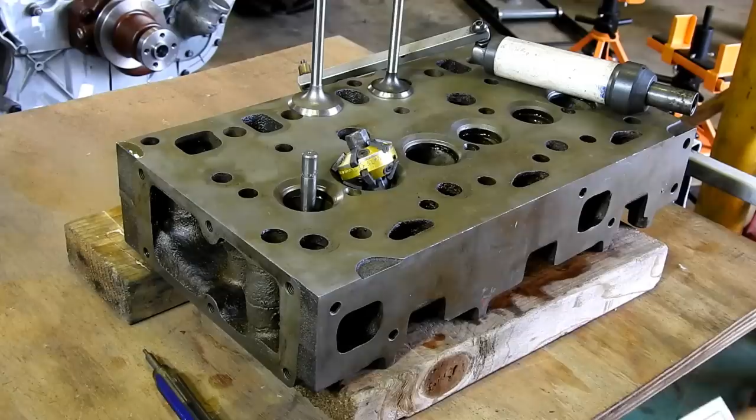We have the cylinder head set up here, and it's sitting up just on a couple of bits of wood, and we found a guide.

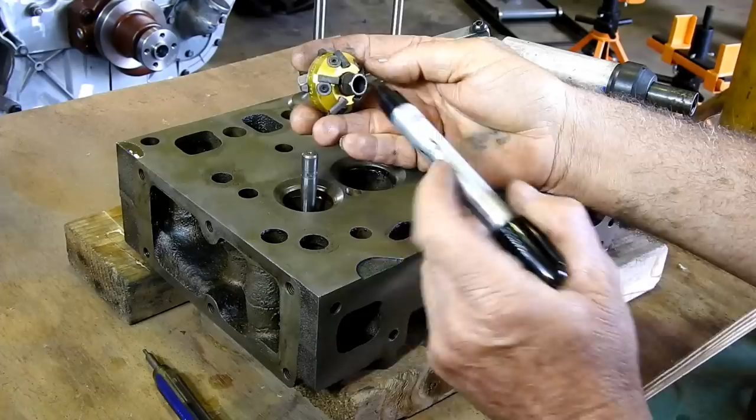Now I use Neway cutters, so have a look at Neway cutters. There's a website for them and all that. You can buy them online, but they're quite expensive, and you get a cutter with some blades in it, and replaceable blades, and we can move them up and down depending on what we need to do, how big the seat is.

And we have a 46 degree this side and a 44 the other. So that 1 degree angle just helps your valve wear better. So the inlet and exhaust valves on this engine are different sizes, but they're both 45 degree.

So we have a flat here. Now you can see the little flat on the valve. The old valves were getting thin, and on the exhaust valves, if it's too thin, it burns around the corner, and that's how you get a burnt valve.

Now you have a surface area here which is 4 millimeters, a little bit over 1/8 of an inch, and what we're looking to do is have the valve seat. If I colour all that in, then just wipe the top edge off. That's not a very good example, really. We're looking to leave about a 1/16 of an inch above. So if we have the valve surface area, something like that, can you see that?

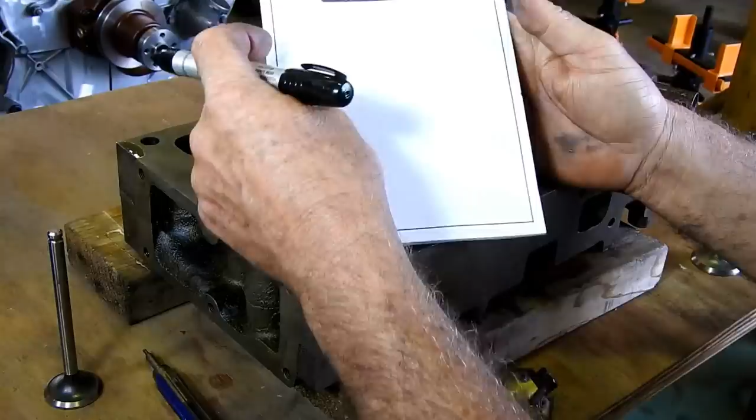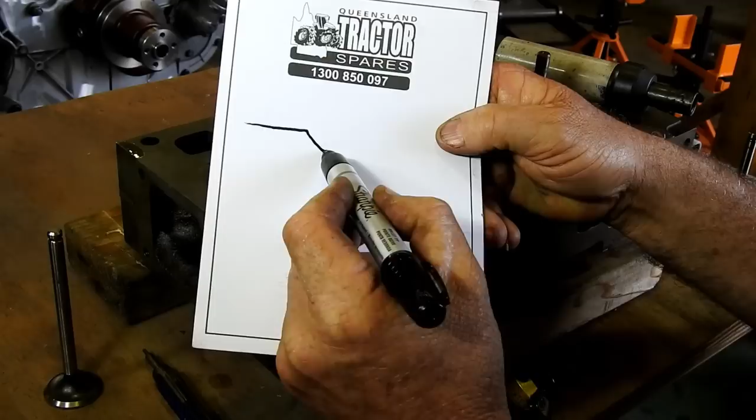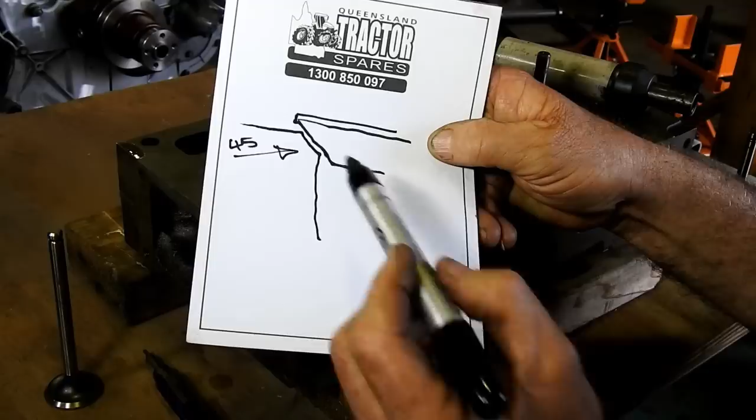I've got a thumbnail sketch here, bit of a guide to see. So normally on this cylinder head, this here would be 45, and when the valve comes down, and that's the valve head roughly, and so we want this to seat around the middle, possibly up towards the top a little bit, but around the middle of that seat.

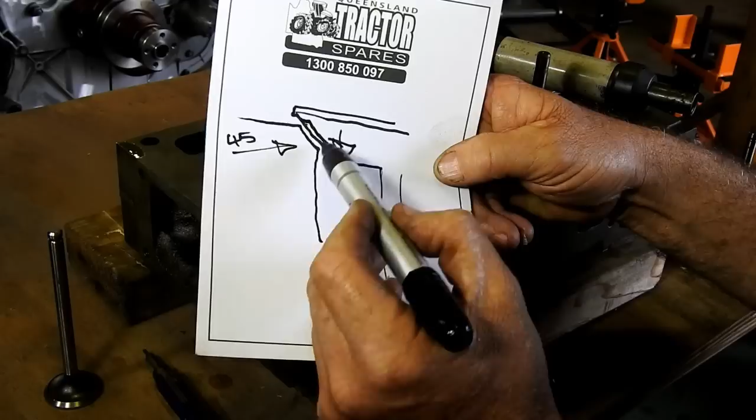Now over time, because the valve goes up and down, up and down, up and down, it wears into here. So we end up with a worn patch here. Then of course, as this valve wears down further, this seat, it wears and it gets a little bit wider, and the valve, instead of just sealing halfway there or a little bit in the middle, this gradually works up

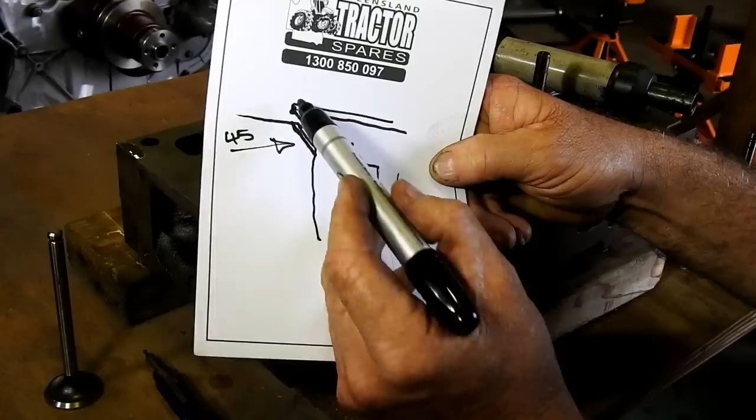And up and up to the outside edge. And the valve tends to sit really low, and with it sitting low, you get the exhaust gas burning over the edge. Now, to set valve clearance, you'll notice you have to set valve clearance after a little while.

Now, when we have our valve here again, have our seat and our valve, as that valve sits down into the seat, down the other end of the valve here, the valve clearance disappears. So this whole valve comes down because of wear, so that valve clearance disappears.

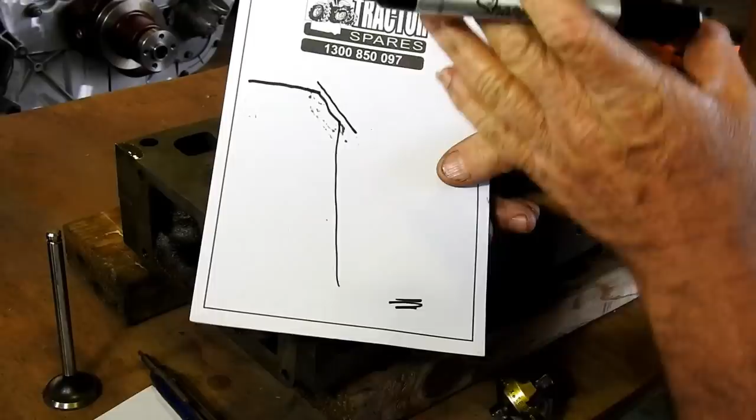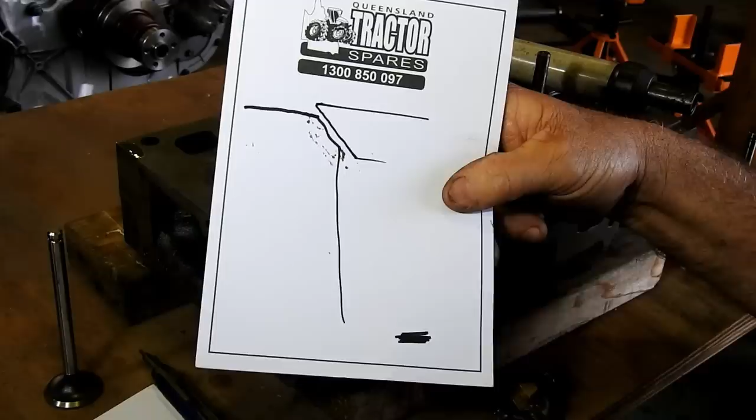So what happens then is that you have your valve sitting here, and because your valve clearance or valve slack hasn't been taken up for a while, this valve ends up riding, and when it's supposed to be shut, there's actually a little gap there, and the exhaust gases through combustion, they leak out of there and they just burn the corner off this valve.

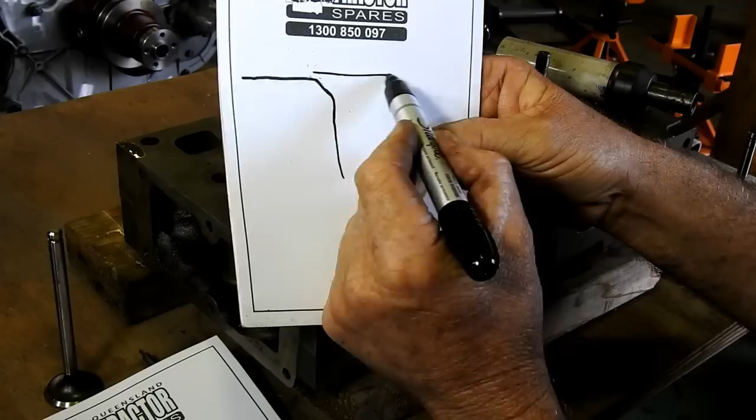So now with the inlet on this tractor, it comes around and it just curls like that, and the dirt over time has worn in there, and then this valve here, it had a really curved head in it, and that rounds from the dust and the abrasion coming in.

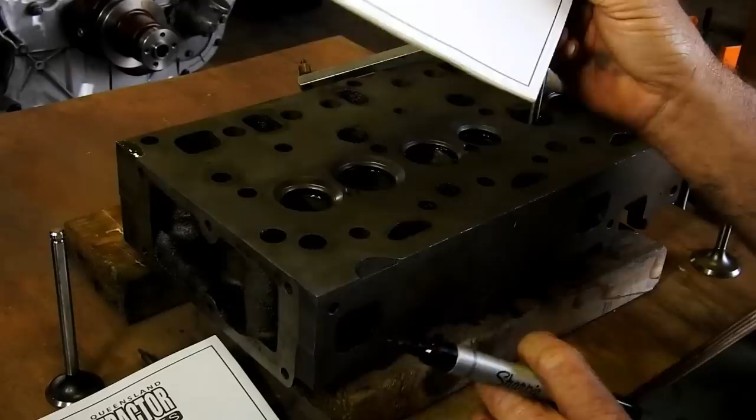So what we're going to do is we're going to bring a cutter down, we're going to flatten this surface out, so that's 45 degrees. Now what happens is when we cut the 45 degrees,

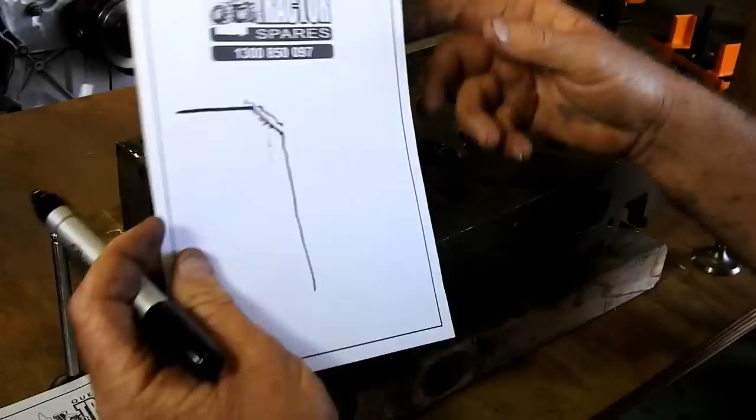This of course gets wider, and it may have started out up here, you know, this wide before, but because we put a cutter in, and the cutter comes down over the top there, and the cutter cuts the seat, this seat gets wider and wider and wider, and all of a sudden the valve here, this seat can be as wide as the seat on the valve, and that's no good.

So with the valve here, and the seat getting wider and wider, well, the seat gets as wide as this surface here, which is just no good.

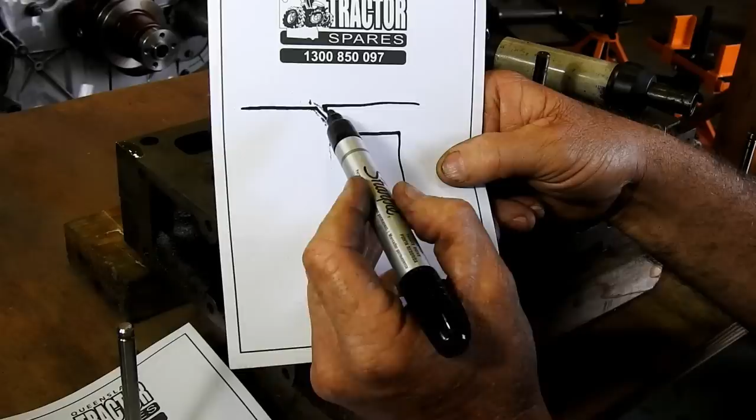Now, what we do then is we bring in a 30-degree cutter, and we actually cut the top off that. And by cutting the top off that, we can actually bring that surface or that contact area to where we want it. If this gets too low down here, we can pop a little bit off here with a 60 or something like that too.

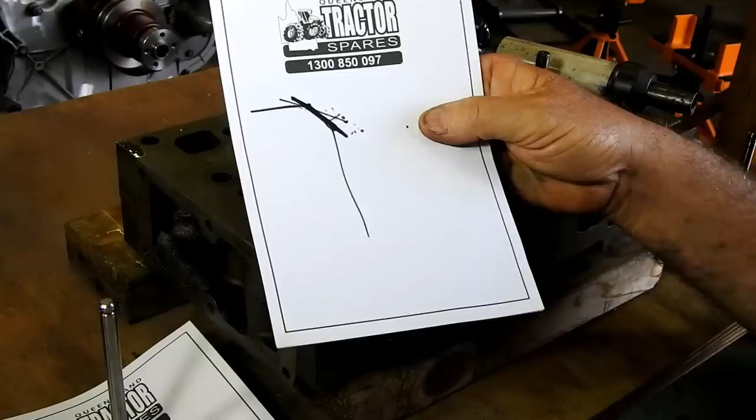So for this exercise, what we'll be doing is cutting the 45 and knocking the 30 off the top, and we can then check on our new valves. They're brand new valves - the old ones didn't have enough meat to warrant grinding again. So with new valves, we need to straighten up the 45 here. We need to make sure that surface is good, and that will be too wide.

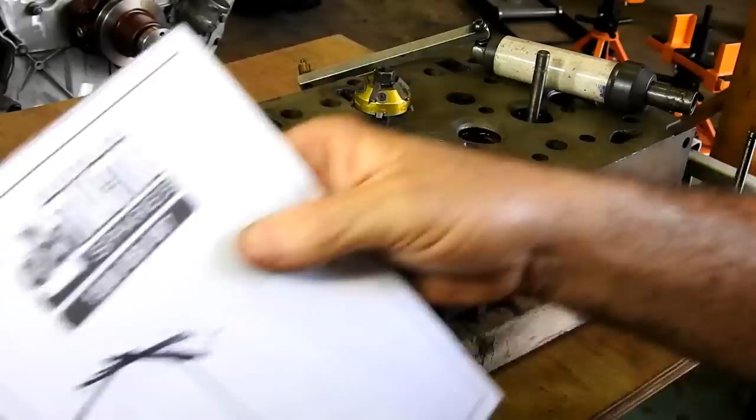You could bet your life on that. So we're gonna cut the top off and drop the seat down in the head a little bit. So anyway, follow along, I hope you can understand that. Clear as mud, but anyway, we'll see how we go. All right, I better get my blackboard out of the way.

And we have a guide. These are specifically ground guides, and the new valve guides we put in - this cutter guide fits in it snugly, there's no movement there, none at all. So first up, we have to check 45 degree. This is 46 degree. So if we put that down there, will that cover the seat we need to cut? Yes, looks like it does. So let's give it a bit of a turn and see what sort of mark we get.

I'll take the guide out so you can see. So you can see that we're cutting down the bottom, we're cutting down here, and we're also cutting up here a little bit. Now that little lip there, I can actually feel that, and that's where the valve had actually sunken down into the head. So it had sunken down just from wear.

So what we need to do is get that out again. I'm probably going to have to sit these boards up on their edge. So we put our guide in once more, put the cutter there at 46, make sure it's okay. I have some synchro stone cutters too that you can grind a stone to match a particular thing.

So there's still a slight mark there where that other lip was. Now I'm going to turn it over, and if we run the 30 - see where the 30 is up here? So you have to be careful that you don't take the 30 out too wide and it comes into your fire ring out here. So the 30 actually needs the stones to come in a little bit.

We have a fair way to go, so that's dropped it quite a bit. Give that a wipe. We'll get our valve.

Give that a wipe, clean all the Sharpie off it. You can use bearing blue. And we'll do a bit more colouring in.

You can hear the door banging in the background, just the breeze hitting it. I'll have to go and, I usually put a wedge in it, and I haven't done that one back door this morning.

Okay, that can drop in there. Go back and forth a couple of times. Right, we're getting more hit on one side than the other just at the moment, which I'll have to have a look why. That should be an even mark all the way.

I actually lap my valves. They say with these cutters you don't need to, but I actually lap them in with a little bit of valve grinding paste too. With the 46-degree cutter I shouldn't need to, but it's something I like to do.

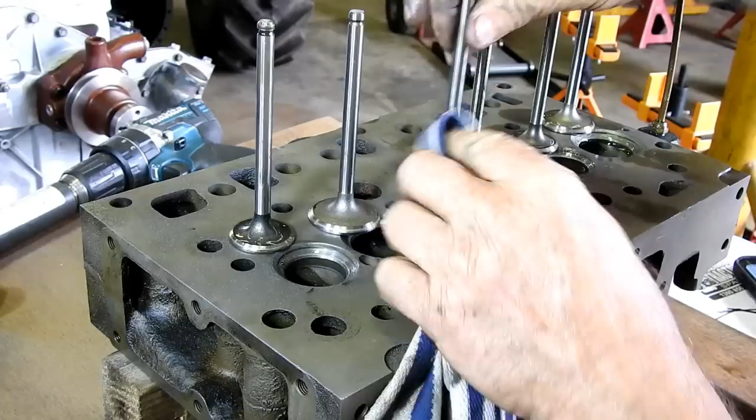Okay, that's all the seats cut. Hopefully you can see where the seats are sitting on the valves, on the inlets and exhausts. So yeah, look, that should seal. We should have nice compression there now. And all it needs, we've got them all marked so we can't get them all mixed up.

And everything's filthy dirty. So we'll go and wash it all up, and we'll assemble the head, and we should be getting close to ready to put the head studs in and pop the head on, but we'll get all this done first.